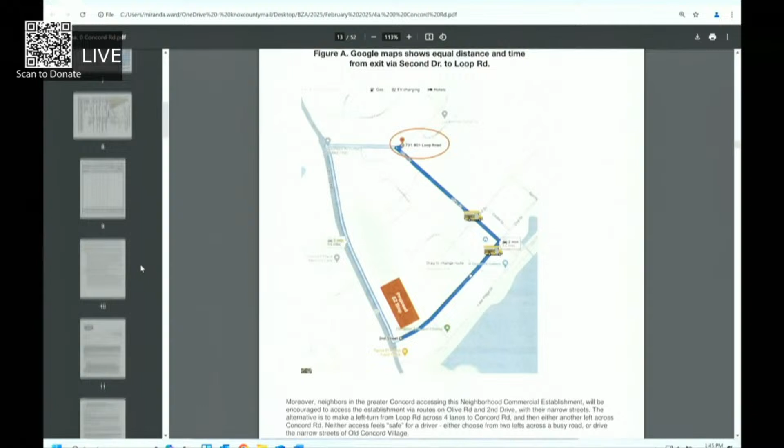The residents of Old Concord and Knox County have spoken loud and clear: 157 public comments submitted and over 1,600 signatures on a petition opposing this development. This overwhelming opposition highlights that this is not the right fit for Old Concord. Their opinions should be given weight, especially about the compatibility of the neighborhood character, because they are the neighbors and they know the character best.

Mr. Mullen submitted data from the property assessor for homes across from Chodo Waggles. His evidence shows that the values have increased over the last 9 years for those houses.

The assertion that the values have gone up is true based on those appraisal numbers. However, inflation should be taken into account for those 9 years. Almost all residents in Knox County have experienced an increase in appraisal values during this time. There's no comparison to what the housing market in Knox County did during that time frame. Did these homes increase more or less than the rest of the market, and how did they compare to the rest of the neighborhood?

I don't think that my firsthand testimony as a home buyer should be ignored. The entire reason that I moved to this neighborhood is its historic nature, the peace and quiet of the neighborhood, and the uncrowded streets that are safe for our kids to bike and walk on. Those things have value, which are not measured by a property appraiser, but valued by all homeowners universally.

We respectfully ask the board to reject this application due to its failure to meet zoning standards. However, if the board considers allowing this project, at a minimum, the following conditions must be required. Please reinstate the staff-recommended right-turn-only onto Second Drive with curbed island to prevent cut-through traffic. Eliminate or reduce the area in the rear with the drive-through lanes. This will reduce noise, light, and vehicle fumes, and eliminate much conflict between the homes and the Masonic Cemetery. Reinstate the staff-recommended limit of 4 gas pumps instead of 7 to minimize traffic and impact on our community.

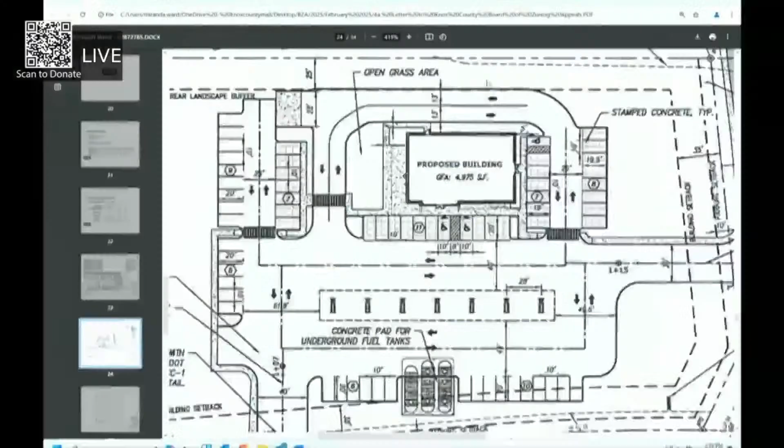I think they're concerned about the 2 arrows to the north, that circulation drive lane behind the building is what they're concerned about. Can I respond to that? Go ahead.

The reason those lanes are there is they're left over from the plans for a drive-through food establishment. That's the only reason they're in the plan in the first place. Now they just want to leave it there as a convenience for their delivery drivers. That's a major concern for us for noise pollution, because those commercial vehicles will be behind the building on the back of our neighborhood instead of in front of the building away from our neighborhood.

Can you live with 1 lane of traffic behind your building, even if it's a wide lane? It'd have to be wide enough to get the vehicles through, and I think they wanted to have both lanes going around to avoid the potential conflict with the patrons of the building.

They're telling me there's another turning radius. I hate to ask Steve to find another one that shows the traffic flow through that. Okay, so you won't live with a single wide lane, but you'd like to have 2 lanes in opposite directions, which it seems to me like it would make your traffic congestion back there even worse. If you have 2 trucks, one coming in one direction, one going the other direction, how do they pass if 1 lane's too small?

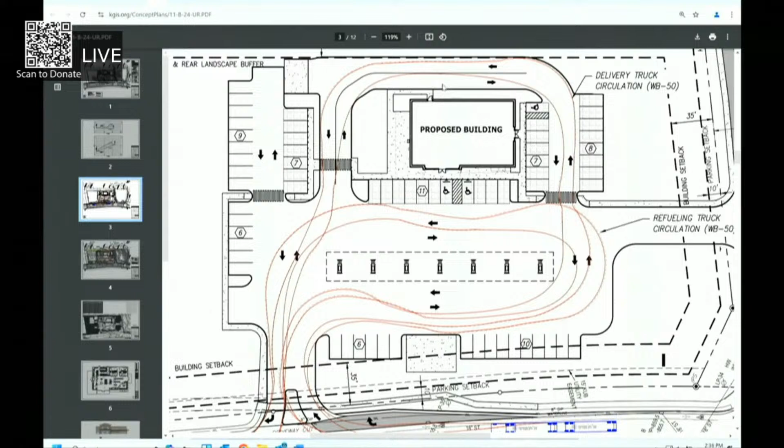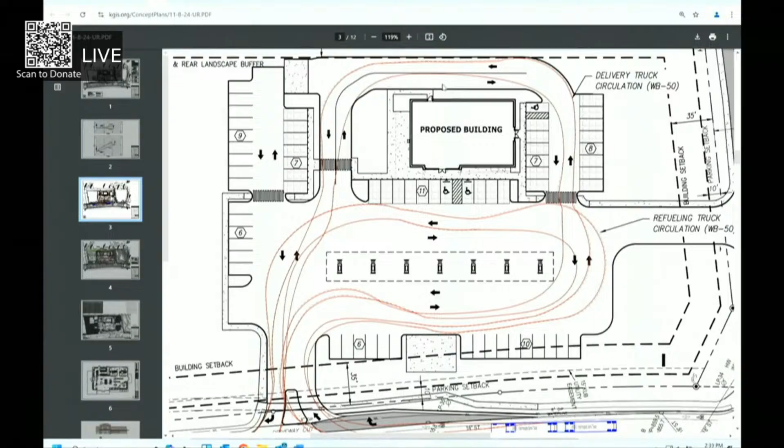I think that if there's a truck parked back there to do delivery, then you cannot get past it. If it's a sanitary garbage truck coming to pick up our garbage— if you're going to testify, you need to come and identify yourself. The reason we wanted the width of that was for the garbage truck coming through there as well. And like Mr. Murphy said, if we have early morning deliveries and you've got a garbage truck coming through, they've got to be able to get to it.

And that's the width of the overall corners, or the width that's there. So the only difference would be there's room for the truck to park behind the store. So we left the lane the same width that the county spec'd for it.

That's a good point. When does your garbage truck usually come to these facilities? What time of day? I'm sorry? What time of day do your garbage trucks normally come? I have no idea for this area because there's different routes for different areas. Not before 7 p.m. or 7 a.m. by ordinance.

And there's no way you can schedule your deliveries so that they don't interfere with the garbage pickup? We weren't aware that the dumpsters were scheduled for the back of the building to necessitate those lanes. And originally they weren't, because those were food drive-through lines. Now we're being made aware that there are going to be dumpsters and trash trucks behind the building on the backside of our neighborhood, and those dumpsters are extremely loud.

Good point. How were you planning to get your deliveries and trash picked up in your original plan when that was going to be a drive-up? The dumpsters have not been moved. That's the location they were from the very beginning. What about your deliveries—could they make those deliveries? You have people standing in the lane trying to go through the drive-up window in your original plan. Yes.

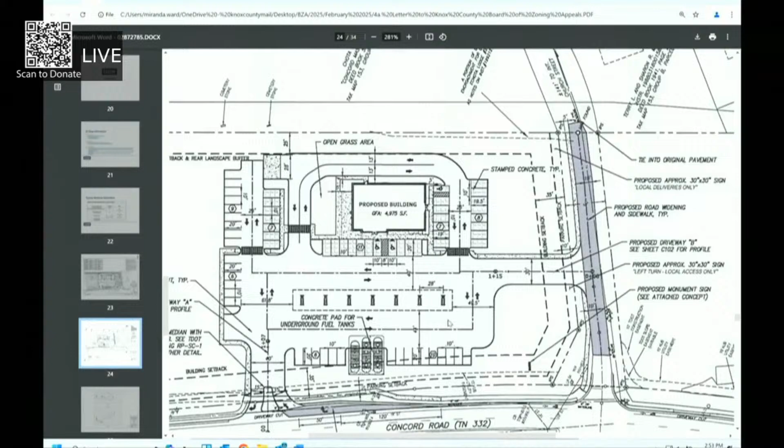Can you bring the site plan back up, just so we can refresh our memory? 1, 2, 3, 4, 5, 6 -- it looks like there's 7 islands. Yeah, 7 islands, 14 points. So you're going to build 7 islands and put a dispenser on each island, 1 dispenser on each island, with a hose on each side? So the person who pulls up on the right and the person who pulls up on the left will each have a hose. So there's 14 points of sale, but on 7 islands. That is unusual, but whatever.

Any other discussion? At this point, I'll entertain a motion one way or the other.

Mr. Chairman, after listening to all these different statements, I'm really conflicted as to the decision. I understand the concerns and objections the citizens have made. I have a problem being that a lot of the objections are speculation, and I understand the reasons behind them. I still have a problem trying to look at the zone requirements with the CN zoning requirements, which allows for the filling station and the restaurant to be included in that area. I appreciate everybody who's been here, and I understand your concerns. I grew up in Bluegrass, went to Bluegrass Elementary, and graduated from Farragut, so I went to school with people who lived in Old Concord. So I'm familiar with the area and have been in it many, many times.

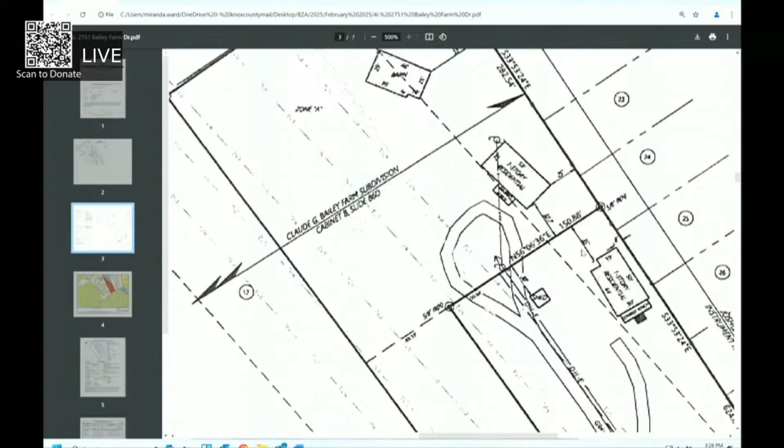And we could probably stay here all night and debate if that's a front or a rear, but that's... I'm compelled to ask for a motion to approve just because it hurts to think about what front side. I make a motion to approve the waiver from a front rear side setback from 40 feet to 32 feet for lot 13R. I second.

Motion's been made, approved and seconded. All those in favor, please say aye. Aye. Any opposition? Thank you. You got your variance. Thank you to the board, and thank you to Steve for his persuasive ways.

4J is a request of Leanne Hovius, represented by Holly Williams, for waiver of front yard setback from 25 feet to 6 feet. The property is located at 1807 Lytton Hall Lane, CLT map 145, Group PJ, parcel 002. Property is zoned PR in the 4th Commission District.